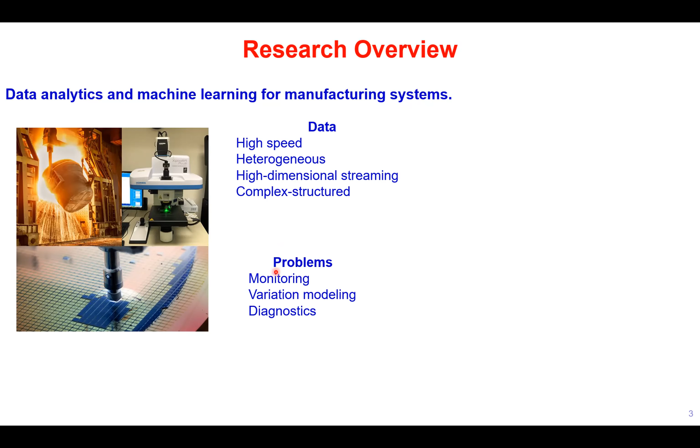In one sentence, my research is on data analytics and machine learning for manufacturing systems. I'm dealing with complex manufacturing systems like steel rolling, steel manufacturing, semiconductor manufacturing, and advanced metrology systems. All these kinds of systems generate complex data, massive data, and data of high speed. Using this data wisely, we can perform monitoring, variation modeling, and diagnostics of the system. So I'm a modeler, and I achieve this goal through developing new models in data science and new computer algorithms. These models and algorithms are motivated by both data and engineering knowledge.

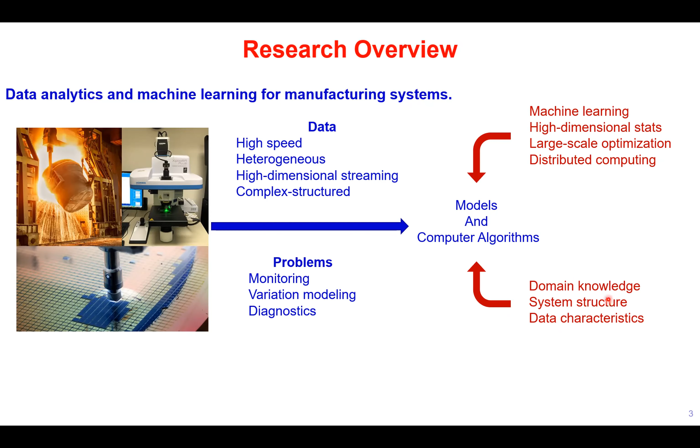From the data side, we have machine learning, high-dimensional statistics, large-scale optimization, and distributed computing. And from the engineering side, we have domain knowledge and also the structure of the manufacturing system, and also the characteristics of the data.

We can see a typical example in semiconductor manufacturing. The chips are fabricated in this way: first we have a wafer substrate, and onto this wafer substrate we deposit a thin layer of material. Then it goes through a polish process so that this material becomes flat, and then we apply a thin layer of photoresist material and develop patterns on this photoresist material. With this pattern, we can selectively etch certain regions of the previous layer. And after another round of deposition and polish, we generate this specific pattern on the second layer. This process is repeated multiple times in the semiconductor manufacturing process.

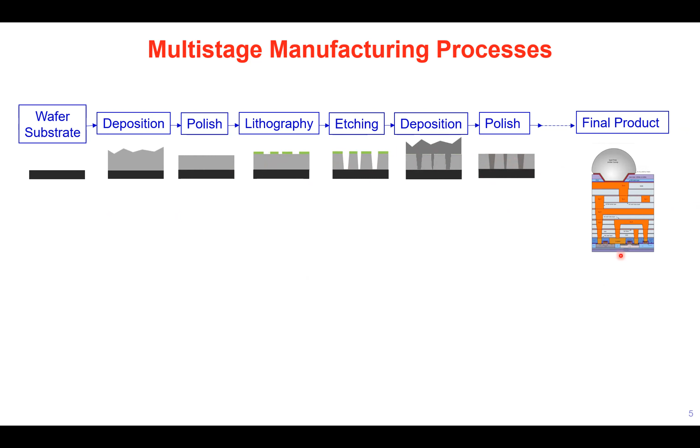Finally, we generate this cake-like structure of the circuit, and that's our final product, the computer chips.

From the data side, every process generates different kinds of data. For example, after deposition and polish process, we have film thickness data. After lithography, we have overlay field data. And after etching, we have profiles of the etched trenches, etc. At the same time, we can record different potential root causes in different manufacturing steps—they are environmental variables or information related to the material, etc.

This process is a typical multi-stage process, and it is characterized by error propagation. Error propagation means that the information from one stage—the potential root cause from one stage—will not only affect our output from this current stage, but also propagates downstream to other stages.

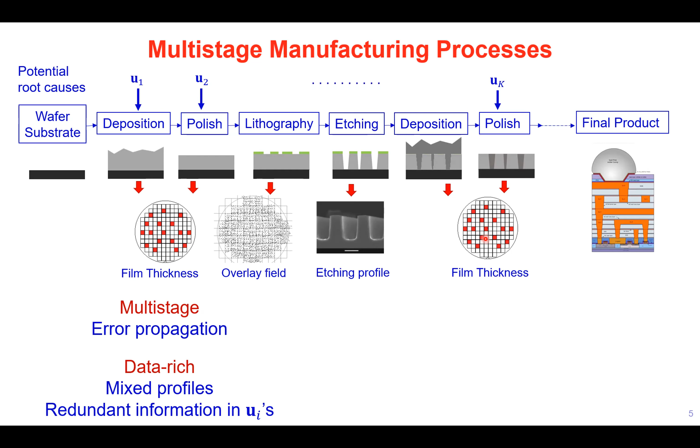Also, this is a data-rich manufacturing process. In every different stage, you have different types of data—curves, images—and these curves and images are of different sizes. So how does the industry deal with this type of data?

Actually, currently these different processes are in different departments, so they just perform monitoring, control, and virtual metrology inside each different stage. Another kind of approach is that they extract useful features from every stage and then perform modeling. But as you can see, the first approach generates a scenario of data silos, meaning all this data is analyzed individually, they do not share information, and we cannot use their relationship in modeling quality and for quality improvement.

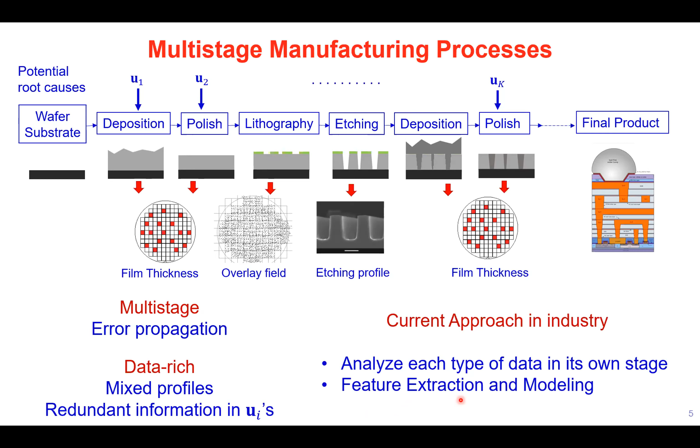For the second approach—feature extraction and then modeling—if the feature extraction is wrong, then my final result will be wrong. So what is the objective of this research?

I aim to develop a holistic framework for multi-stage manufacturing processes in data-rich environments. I hope that this approach can achieve three goals: first, we can identify the actual root causes that indeed affect the process quality and product quality; second, we can know how these root causes affect the quality measurements; and finally, we want to associate quality measures with several key variation patterns.

So the contribution of this work is threefold. First, we propose a general and extendable framework for the data analytic problem for multi-stage manufacturing process. This general framework can analyze the heterogeneous quality measures and potential root causes simultaneously.

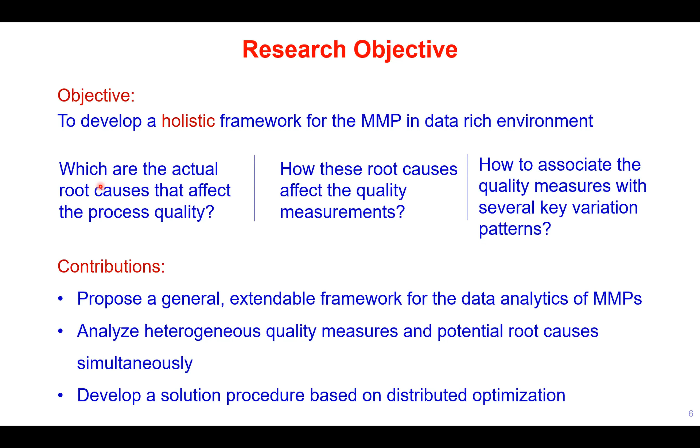We also developed a solution procedure based on distributed optimization, which is very important because this kind of process involves so much data.

Before our modeling, how we deal with this data depends on the process and data characteristics. What are these characteristics? We talk about error propagation: the potential root causes may affect the current and follow-up stages. We call this the cascading effect.

We try to keep a very comprehensive set of potential root causes, but not all of them are troublemakers to the process. So we want to select the actual root causes from them, and we need to consider the sparsity of actual root causes.

The third thing is the smoothness of the quality measurement. We mentioned that the outputs are mixed profiles, curves, and images. To effectively lower the dimension of the problem, we need to consider the smoothness property of these curves and images. The fourth thing is that usually the quality outputs are associated with relatively few underlying quality issues.

This means for different actual root causes, they may cause similar kinds of quality problems on these outputs.

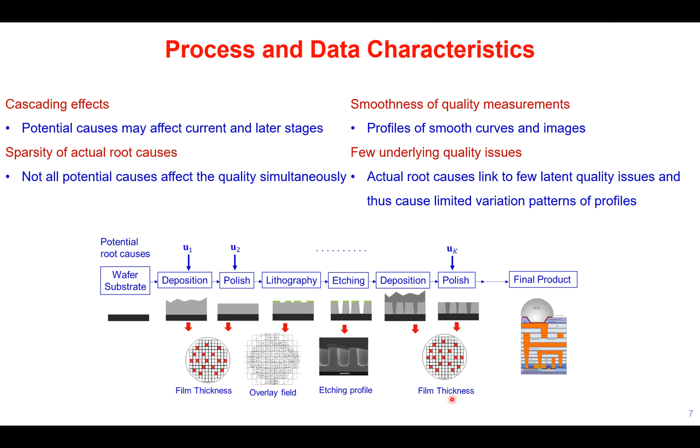Based on this consideration, we propose the following process model. There are K stages in total, and for every stage we have a vector of the potential root causes, which are our measurements. Also for every stage, we have a matrix output.

That's our quality output, and these outputs either represent multiple functional signals or one image. We assume a linear relationship between potential root causes and all these quality outputs.

So we develop this linear model, and we consider the cascading effect so that the stage K potential root cause can only affect stage K, K plus 1, K plus 2, etc. This is a linear model with scalar inputs and matrix outputs.

If we collect all of these coefficients together, we have many offset matrices and many effect matrices, and they are the coefficients of our model.

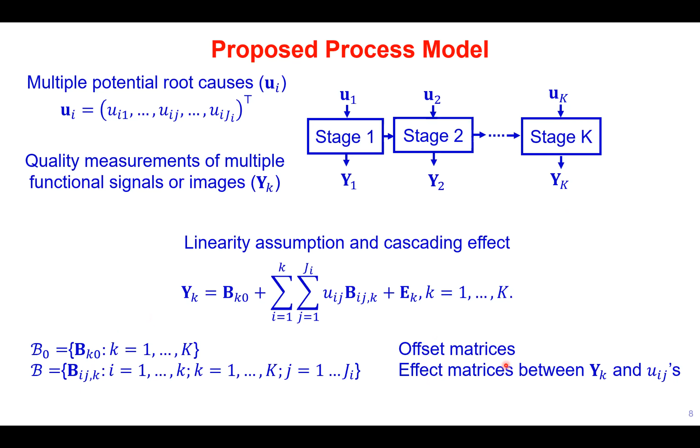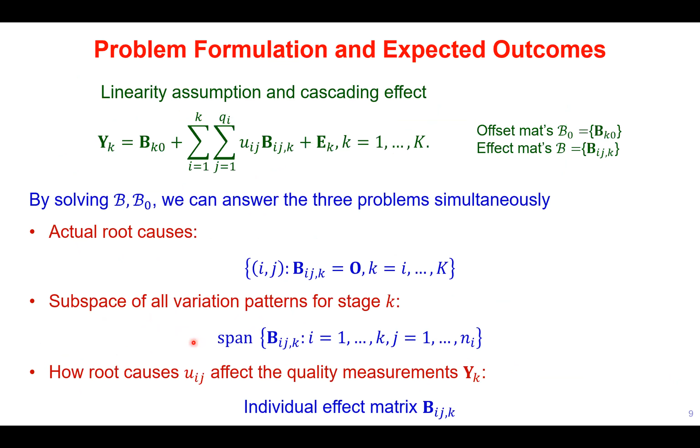Estimating these coefficients is a hard thing to do, but if we obtain these estimations, we can actually answer all three questions we posed before. We can find the actual root causes and the subspace of all the variation patterns, and we can also know how root causes affect the quality measurements.

So to perform this estimation, we formulate a machine learning problem. This problem involves one loss term plus several regularization or penalty terms. The loss term reflects the magnitude of the prediction error.

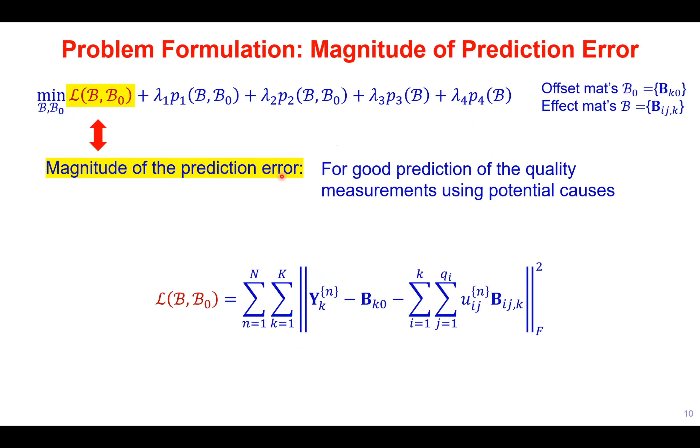That is to say, how well my potential root cause can be used to interpret my product quality.

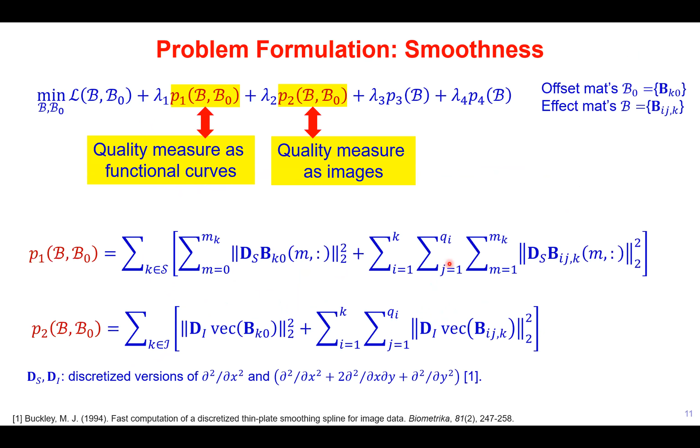The second and third terms are used to represent the smoothness of the response. Because the quality responses are smooth, the associated coefficient matrix rows or the entire matrix are smooth, depending on whether this stage is associated with multiple curves or a single image. So we apply these two smoothness penalizations in the second and third terms.

For the fourth term, we select the potential root causes. Not all potential root causes are actual root causes. If something is not an actual root cause, it will not affect the system at all. So how do we represent this?

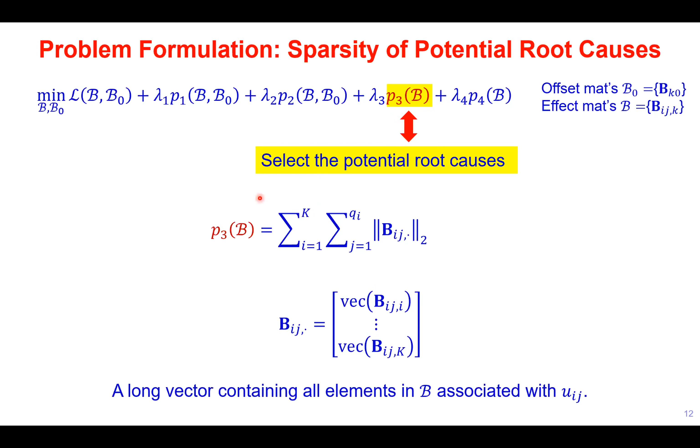We collect all the elements within the effect matrix that are associated with this potential root cause Uij, and try to align them in a vector. We apply the two-norm and use this group lasso penalization to help us identify the actual root causes.

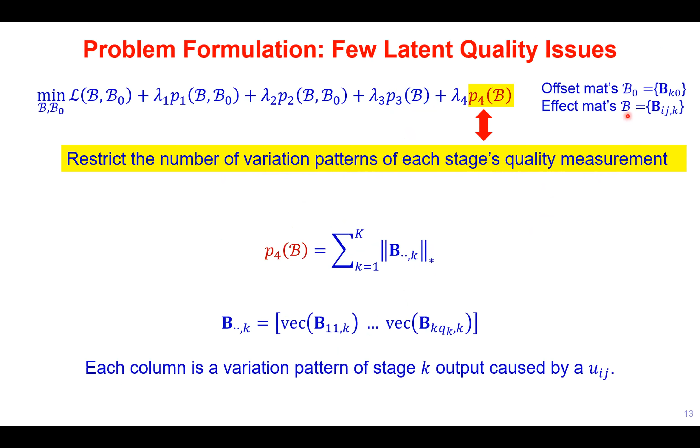For the last term, we restrict the number of variation patterns of each stage's quality measurements using this nuclear norm penalization, which also associates with the reshaping of the effect matrix here.

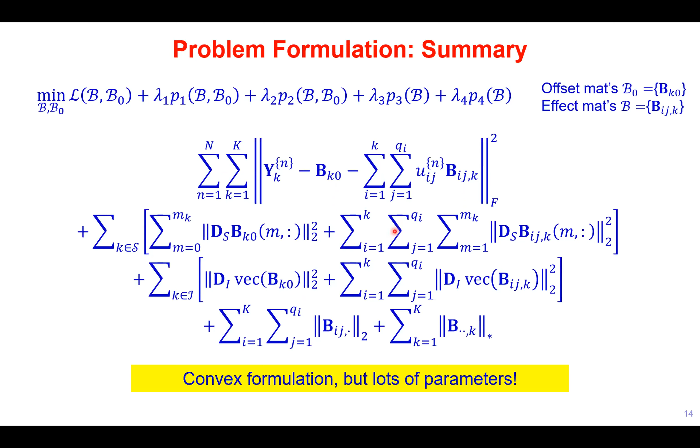So in general, if I put everything together, this is my objective function to solve these all the coefficients B, and that is very, very complex. However, that's a convex formulation. Then how to solve this problem?

Specifically, we developed an efficient algorithm for the curve smoother and the image smoother based on discrete cosine transformation.

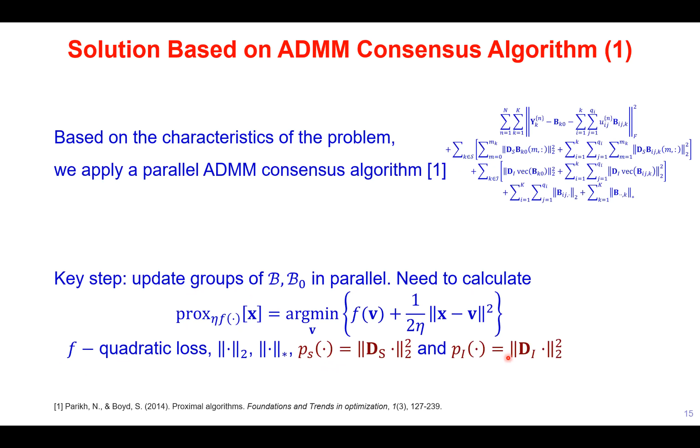And here is the overview of the ADMM consensus algorithm. We just ignore the details in this algorithm, and let me briefly introduce how it works. First, we initialize B and B0 with several replicates.

And then in the iteration, we first update different groups of elements in each replicate of B and B0 individually, and all these operations can be performed in parallel. Then in a global aggregation step, we aggregate all of the updates for these replicates and calculate their grand average, to complete this step of iteration.

So you can see that if I have a parallel computing framework, this algorithm can be achieved effectively.

And in the simulation study, we verified this approach using a 4-stage test bed with 20 potential root causes. You see in different stages that generate different kinds of quality output, either multiple signals of different length or different sizes of images. We find that this algorithm identifies the actual root cause, understands the root cause effect on the profile measurements, and also identifies the subspaces of underlying quality issues.

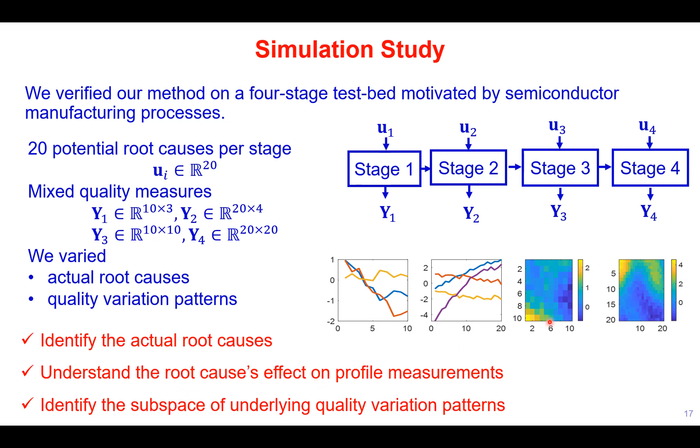So I just skip the details of this simulation study, and here's my summary. In general, in this work, we propose a holistic modeling and root cause diagnostic framework for data-rich multi-stage manufacturing processes.

So for this framework, we consider multiple root causes in every stage, and the quality measurements of multi-signals or images of different sizes.

So the significance: the first one is that this is the first multi-stage manufacturing process analysis method based on distributed optimization. And the second one is that this method is extendable to more types of data by adjusting these loss terms and penalization terms. So highly customizable.

And now I'm going to briefly introduce two other research topics just for you to get a sense of the flavor of this series of research. The second one is involved with a steel rolling process.

And we propose a multiple event identification and characterization algorithm by retrospective analysis of the data. What is retrospective analysis? So if you're a data scientist, you go to a factory and say, okay, I can solve your problem.

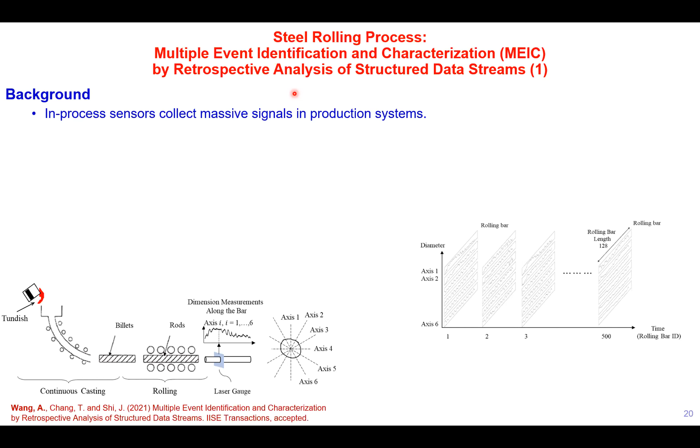And also during what time the variation happened, right? So this is what we mean by retrospective analysis.

And the current approach of achieving this is: first, we use some quality control methods to identify in which time segments there is something weird happening in this data, and then clustering analysis to see what are the types of faults in these different time segments, right? However, this is not automatic, and the error in detection will lead to wrong classification results.

So our goal in this work is to develop an automatic tool for retrospective analysis. It can perform the event identification and characterization simultaneously. So here are 3 keywords: what is event, what is identification, what is characterization.

So event here means the abnormal variation patterns that happen in this, let's say, 3-month period. And identification means we want to find the time intervals when this event occurred. And the characterization means how an event affects the sensor signal, right?

So let's see an example. This is a steel rolling process, and this steel rolling process fabricates rolling bars. And after the fabrication process, this rolling bar passes this laser gauge.

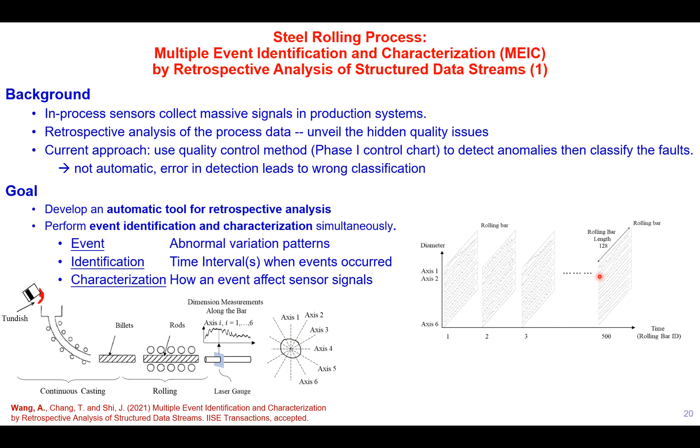And in total, we have 500 products. So this is the data that we have. And through this event identification and characterization process, we can decompose this into several types of events.

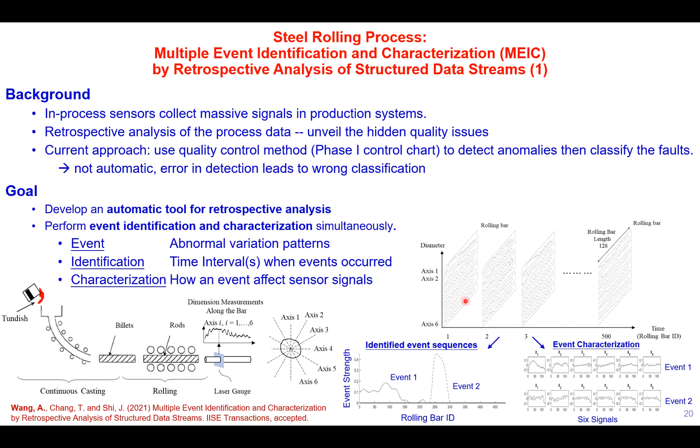For example, we can see event 1 happens at time from 0 to 100, and event 1 causes this kind of variation pattern in my data, so axis 1 is larger at the first half. For event 2, which happened between 200 and 250, it's characterized by a tapered end of the rolling bar. This is the outcome of our algorithm in general.

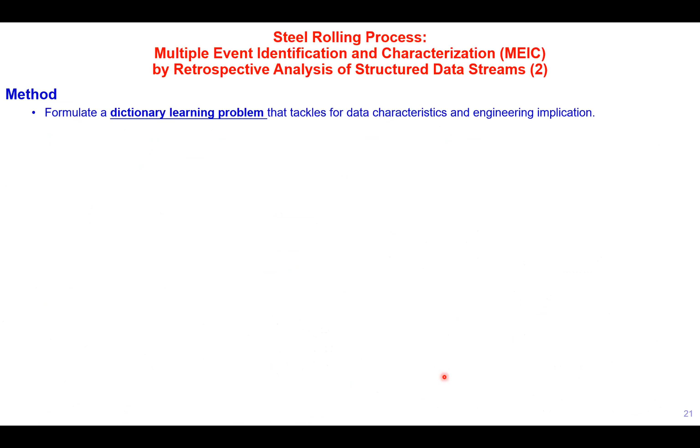How did I achieve this? I formulated a dictionary learning algorithm that tackles the data characteristics and the engineering implications. Here is the optimization problem that I formulated, and here X is my data matrix.

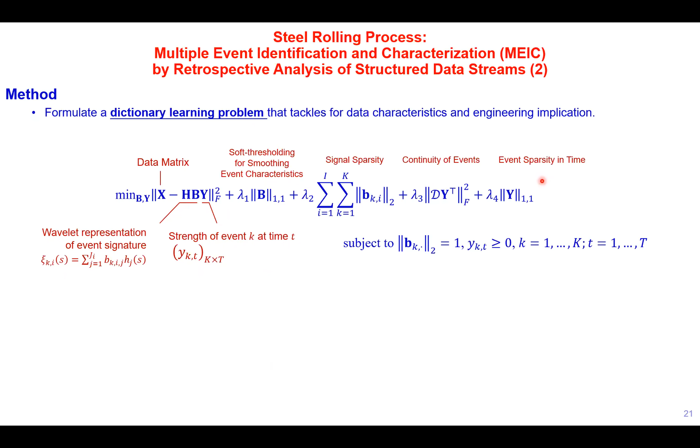This data matrix is decomposed into the multiplication of my event signatures, represented using wavelet functional data analysis methods, and also the strength of the events at different times. I used multiple penalizations to reflect the smoothness of these event signatures and the characteristics of the event sequence, and then I used a blockwise coordinate descent algorithm to solve this problem.

So here's the outcome and the impact. This approach is validated by a simulation study and real steel rolling data, and it significantly automates the process of retrospective data analysis, especially when we have multiple functional curves or high dimensional data. This is a useful and automated tool for quickly understanding massive processing data.

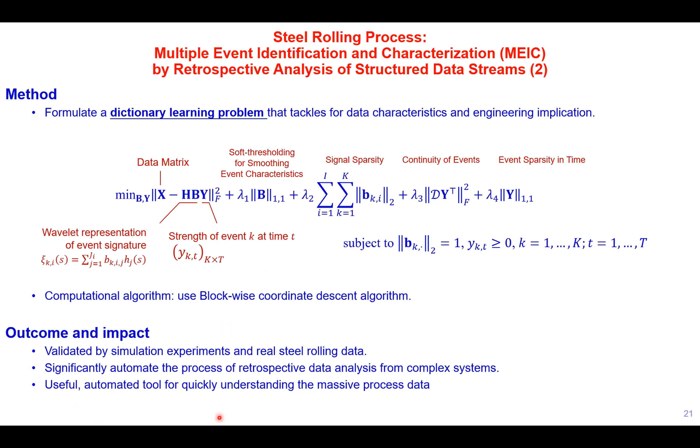Okay, finally I'll quickly go through the last example. This example deals with tensor data analysis for CT image analysis. Tensor data are like data blocks, either 2D signal arrays or image sequences, and they frequently appear in many applications. It's high dimensional but content-rich information.

Our goal in this study is to uncover the information buried in the tensor object. For example, we can see this series of CT images obtained from the aortic valve of a human heart, and you can see there are yellow regions that are calcium deposition on this vessel. Our goal is to identify that region for reconstruction of the prototype.

Our approach is to decompose the data tensor into the summation of three parts: background, calcium, and measurement error, to find the regions of calcium. This is our output, corresponding to each frame.

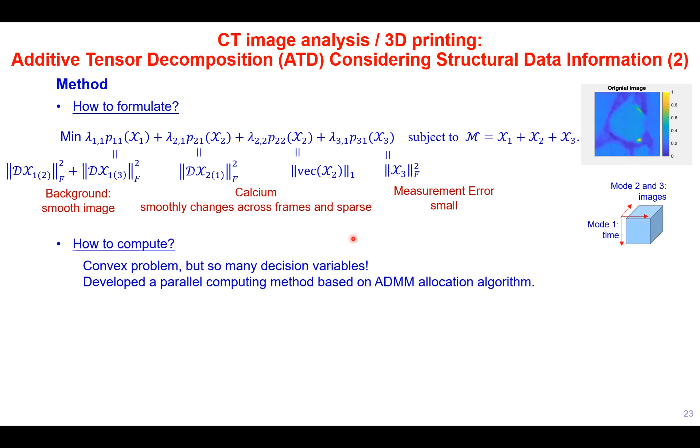How did we achieve this? Again, we formulated an optimization problem where each term tackles different characteristics of the background, the calcium deposition, and the measurement error, addressing smoothness and sparsity properties. Then we proposed another optimization algorithm based on ADMM to solve this problem.

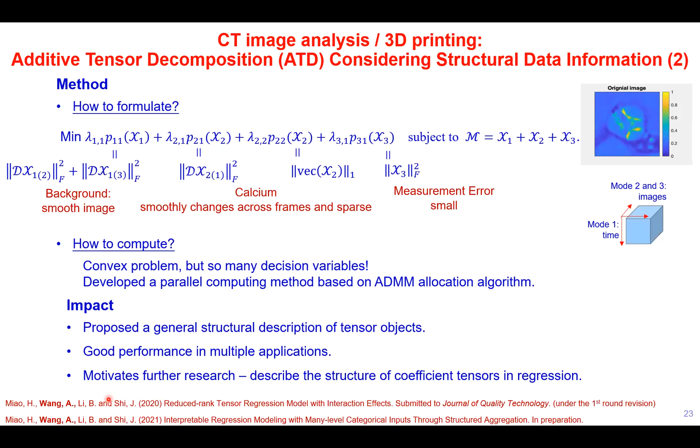This is actually a general structural description of tensor objects, and this method is applied not only to this medical problem but also to other data analytical problems involving tensors. This also motivates further research into tensor regression, etc.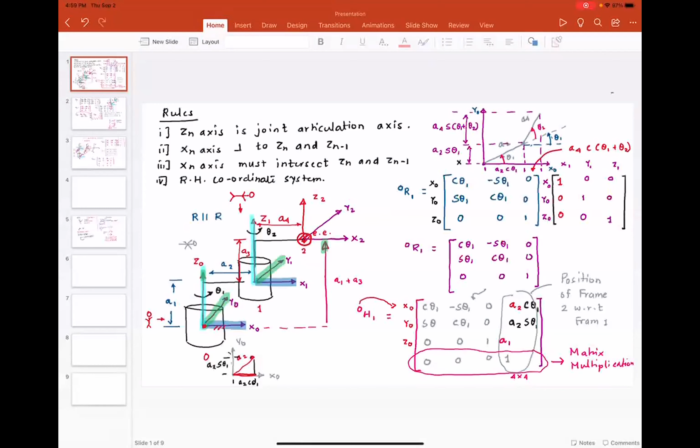By now you should have some understanding of what the project is, and you should have actually started working on the project and 3D printing. I just want to make sure that if there are any questions related to the project, or to the class or lesson, I would be happy to answer. Any questions on the material we have discussed so far? Any questions?

Quickly, if you have 3D printed your components, from next week onwards you are welcome to stop by. I will announce the office hours for Borna along with the checklist, and then you can come and start picking up your parts. But one thing you want to decide is what project you're going to work on, because the microcontroller you will get will be suitable for the project you have in mind.

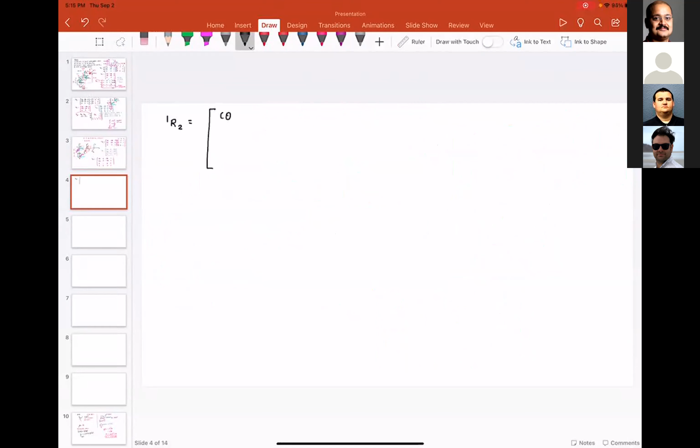So in last class, we worked out developing the homogeneous transformation matrix related to the first joint. Now what I'm going to do is write the homogeneous transformation matrix for the second joint, and we are going to start with the rotation matrix. So now, 1R2 - since the axis of articulation is aligned with Z, my rotation matrix is going to remain the same: cosine theta 2, minus sine theta 2, 0, sine theta 2, cosine theta 2, 0, 0, 0, 1. But don't forget the important part, which is the projection matrix.

Just a second, Zoom quit unexpectedly. Zoom unfortunately is giving some problem today - it all of a sudden started asking for passcodes. Zoom is quitting. Unfortunately, that's bad.

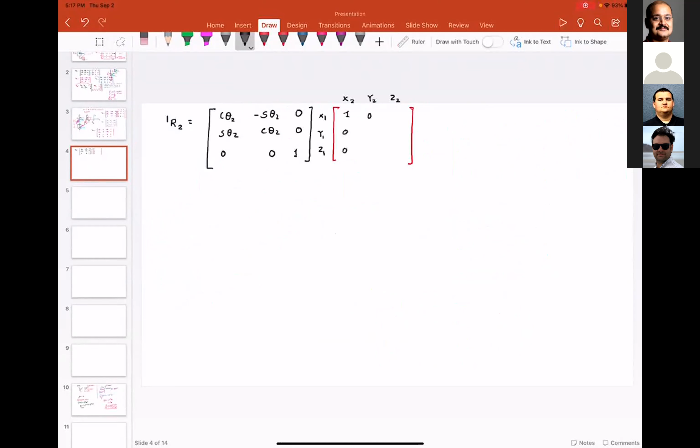Okay, finally. So what I need to do is I need to have x2, y2, z2, x1, y1, z1, and let's check x2. Can you see x2 is aligned with x1? Are you with me? Y2 is aligned with y1. Z2 is aligned with z1. What does that mean? This is going to be 1, 0, 0, 0, 1, 0, 0, 0, 1. Agreed? And the product of these two is going to be my rotation matrix. What would happen to my homogeneous transformation?

Recording in progress. Yeah, I'm pretty sure there is an issue with Zoom server. I guarantee you there is an issue with Zoom server.

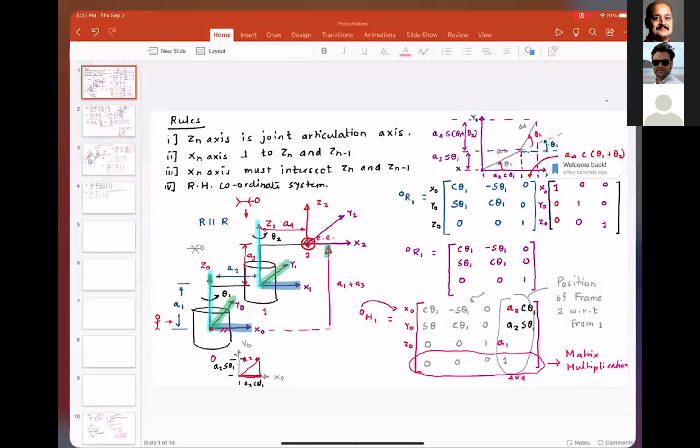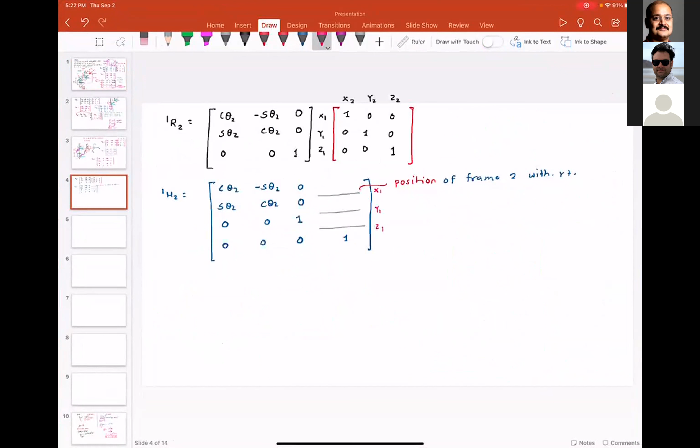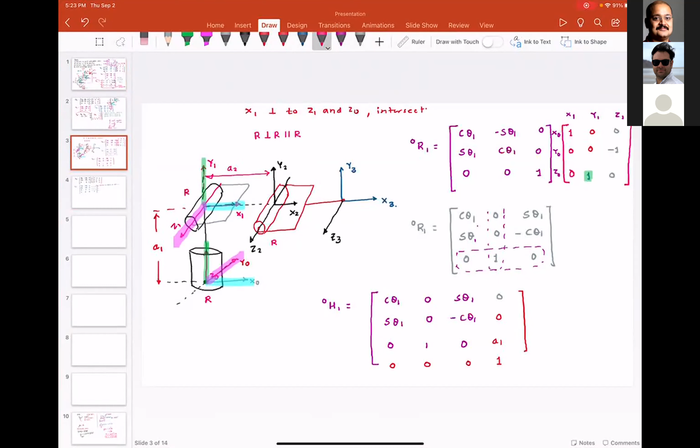Okay. Position of frame 2 with respect to frame 1 along x1, y1, z1. Now let's start. What do we have? Please note, I'm going to add one distance, which is here, which is A2. I will ask you the very first question. So look at their z-axis. Can you see that those z-axes are aligned? Do you agree with me? Those z-axes are aligned in a sense that they are parallel to each other. Now, my question to you is, first and foremost, can I write 0 over here?

Can you hear me now? Okay. Yeah, you're good. Okay, awesome. Finally. So today, unfortunately, we have some issues with technology, but nevertheless, we will continue studying.

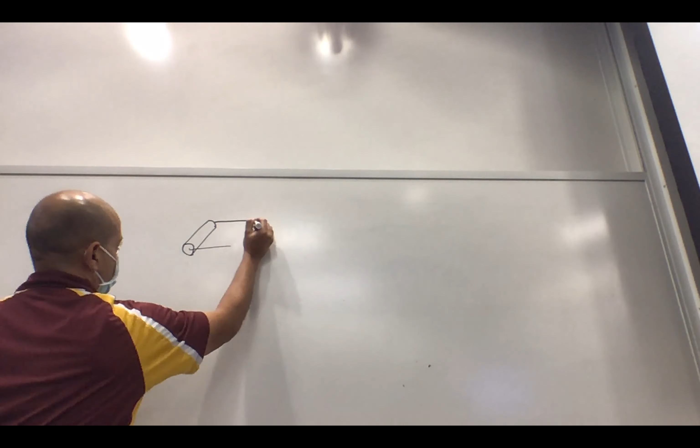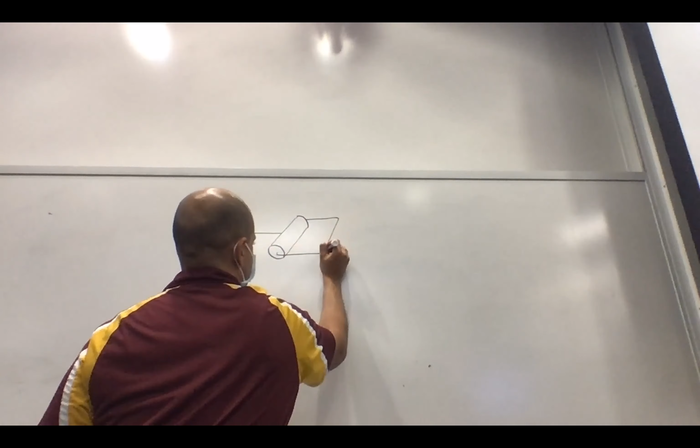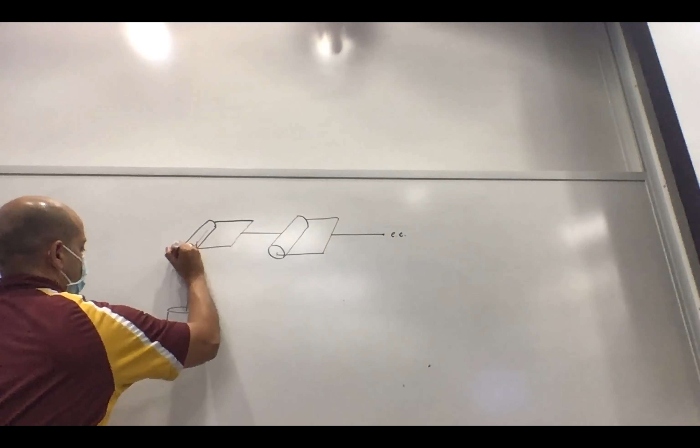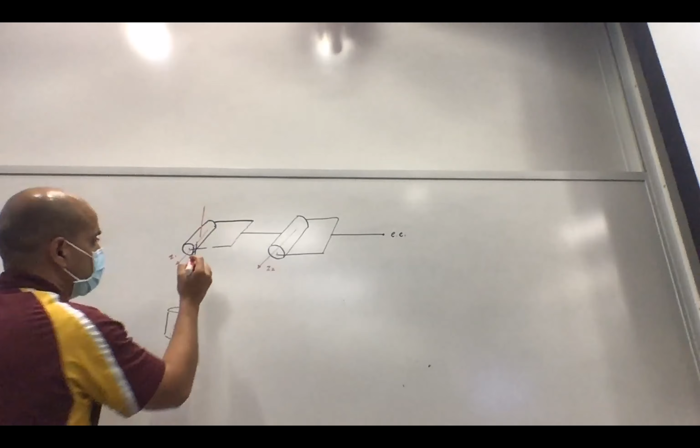So you have the first revolute joint that we actually finished. Then you have the second revolute joint, and then you have a third revolute joint, which is over here. And then we have this end effector. Bear with me for a second, let me set up the z-axis. This is z1, this is z2. Then I have x1, and I have y1, and I have x2, and I have y2.

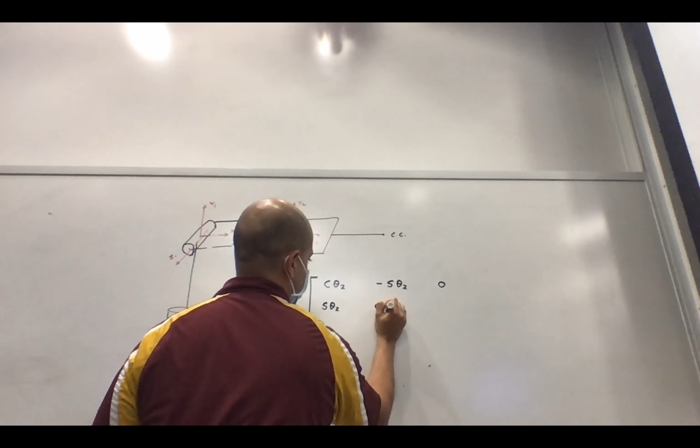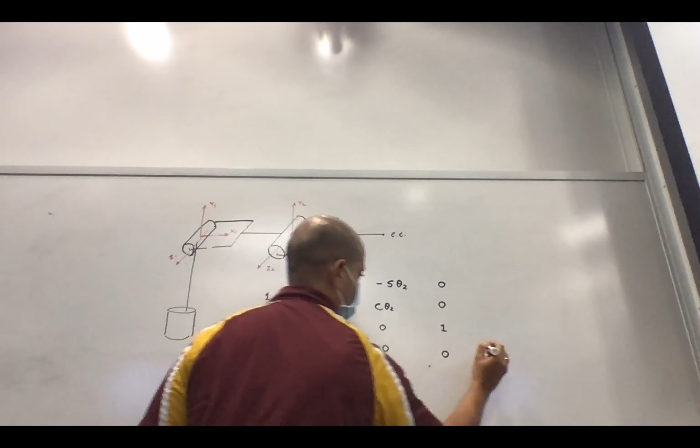Now the objective here is to find out 1H2. 1H2 is cosine theta 2, minus sine theta 2, 0, sine theta 2, cosine theta 2, 0, 0, 0, 1, 0, 0, 0, and you have 1 over here.

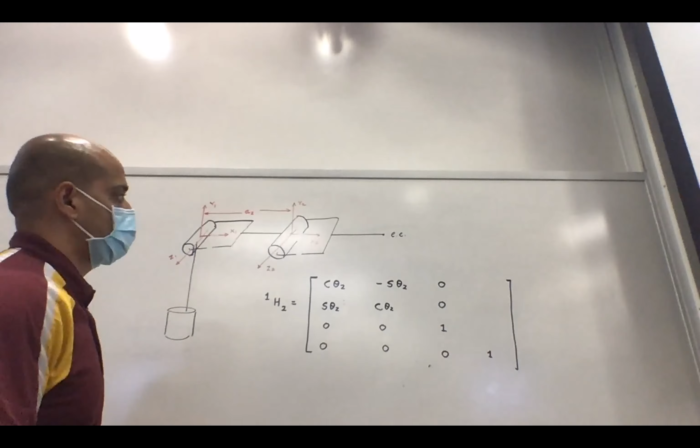Now I want you to observe that this Z1 and this Z2 are parallel to each other, but they are in one and the same plane, and this plane is not going to change. So what it means is I'm going to write 0 over here. The next thing I want you to observe is, as this joint rotates - this is very important, this is my theta 2 - as this revolute joint, which is frame number 2, rotates with respect to frame number 1...

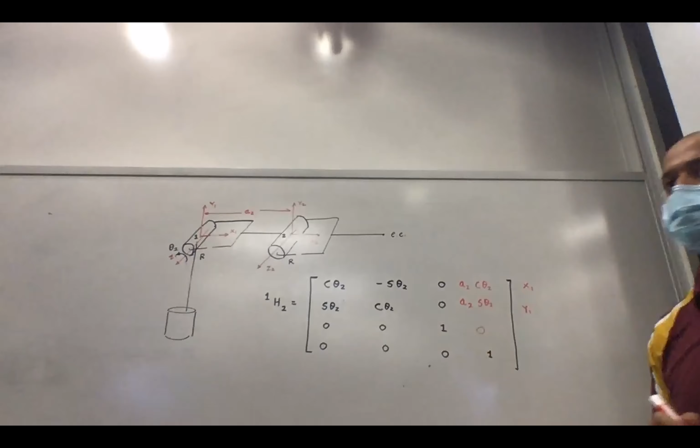So this is my frame number 1, this is my frame number 2, so frame number 2 is going to rotate. So I want to find out the component, or the position in x1, position in y1. We looked at this type of problem in last class. Can I write down A2 cosine theta 2 and A2 sine theta 2 as my second homogeneous transformation matrix? It is absolutely important that x1, y1 - again these are the distances, A2 sine theta 2, these are the distances - but these distances must be expressed in the previous frame vector. So it needs to be x1. So please check that you have a vector going A2 cosine theta 2 and A2 sine theta 2. When theta 2 is equal to 0, A2 sine theta 2 becomes 0, and this just becomes A2, which is the case in the present situation. Everyone understood this?

Question? Online question? It's not for... Okay, so this is x1, very important. X1 comes from here.

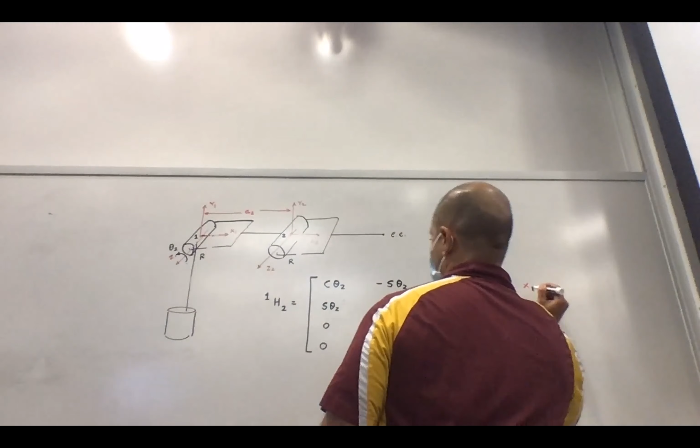Now what I'm going to do is, and the next part is super simple - last frame, to save my work, I assume this frame to be aligned with the previous frame. So this is x3, y3, z3. And this distance, I'm going to give you as A3. So this distance is A3.

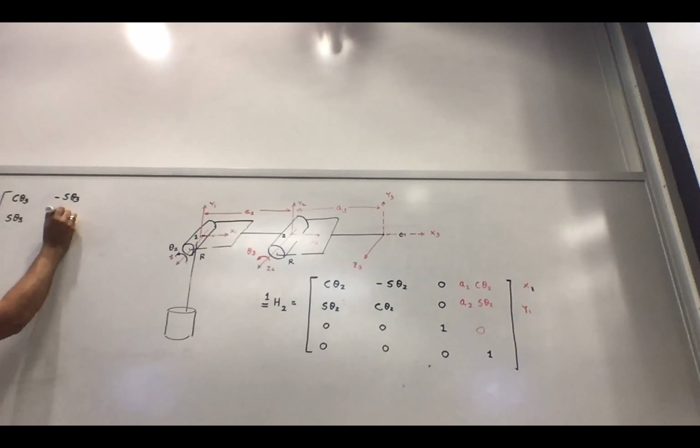Now what I want you to understand is a super simple example here. First and foremost, what is the rotation transformation corresponding to this joint? So the rotation transformation corresponding to this joint is governed by theta 3. I'm going to say here 2R3. Again, the rotation is about z. So cosine theta 3, minus sine theta 3, sine theta 3, cosine theta 3, 0, 0, 0, 0, 1. And never ever forget the projection matrix. Can someone tell me what the projection matrix is going to look like?

X3, Y3, Z3, X2, Y2, Z2. Isn't it the identity matrix? Yes, this is an identity matrix.

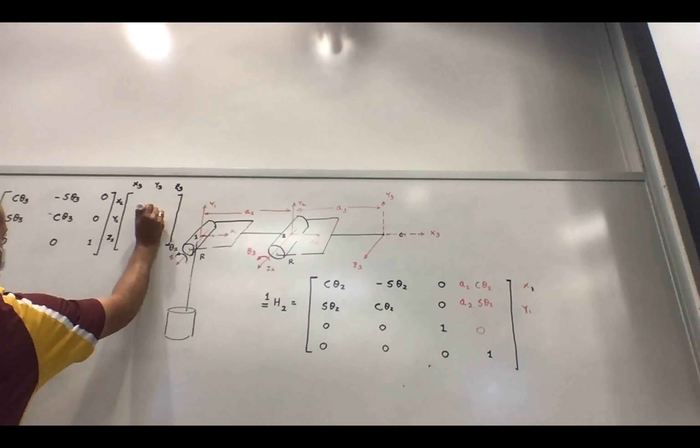So for 2H3, you can tell me this is going to be cosine theta 3, minus sine theta 3, 0, sine theta 3, cosine theta 3, 0, 0, 0, 1, 0, 0, 0, 1.

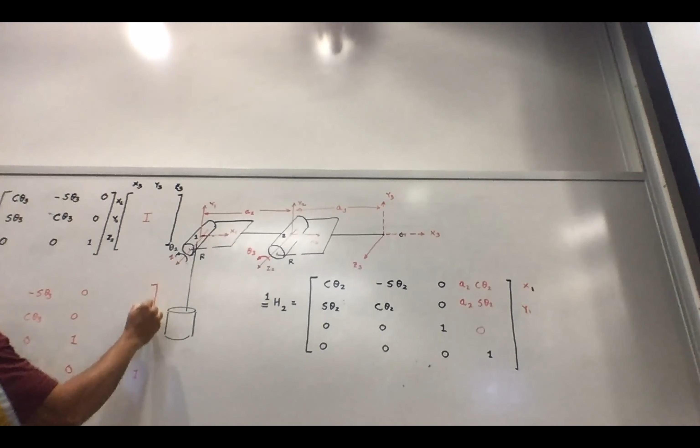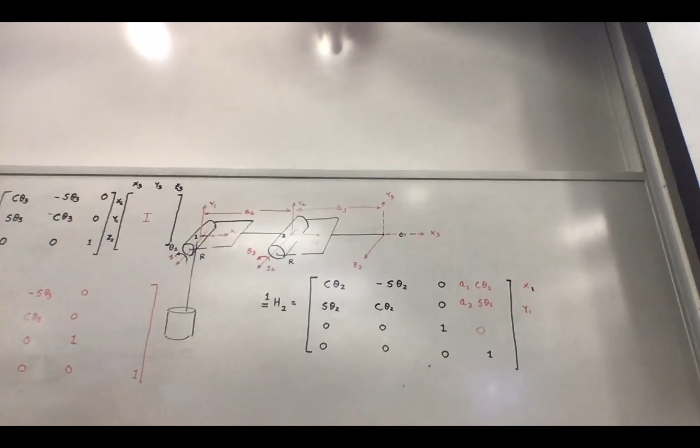And please note, once again... question? I don't think they can see that. Yeah, we can see that.

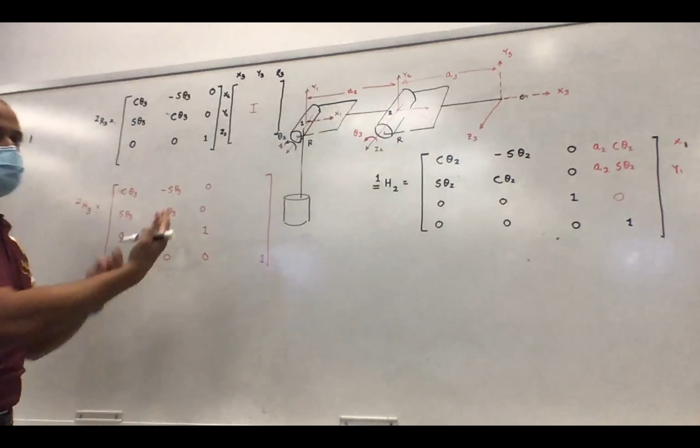Okay, so here please note Z2 and Z3 — they are in the same plane, so again I'm going to write 0 here. Again, please note this should be X2, Y2, Z2.

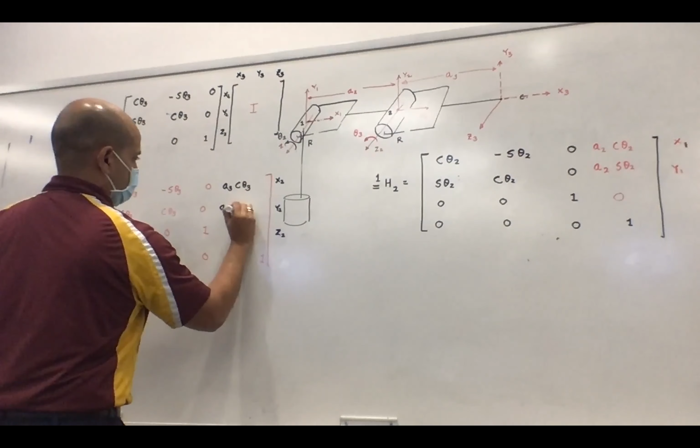So X2 is going to become A3 cosine theta 3, A3 sine theta 3, and let's not forget this one. Everyone understood this?

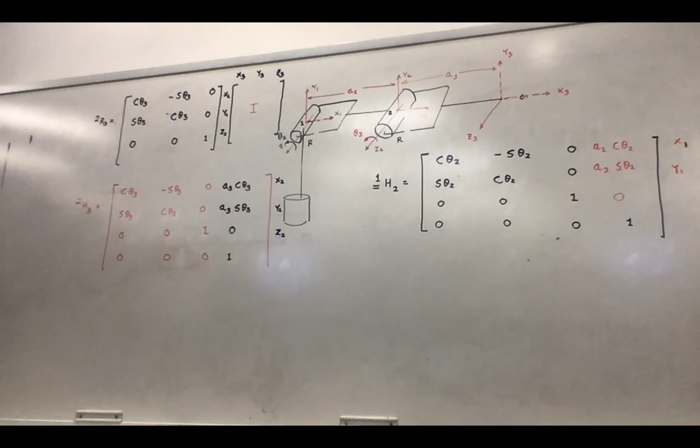Now at this point you can be adventurous and try to perform matrix multiplication by hand, or be lazy like me and go to MATLAB. So that's what I'm going to do. I'm going to open MATLAB.

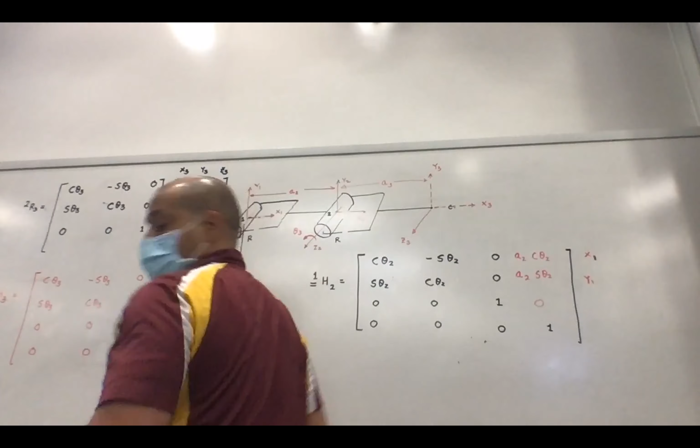Bear with me just a second while I actually open MATLAB. Can you put a board up? What do you want me to do? Put a board on top. Well, if I put the board on top, then I think those guys won't be able to see. So why don't I do something like this? Is it good? Yeah, and I'm gonna leave this over here so you can take a picture later if you want to.

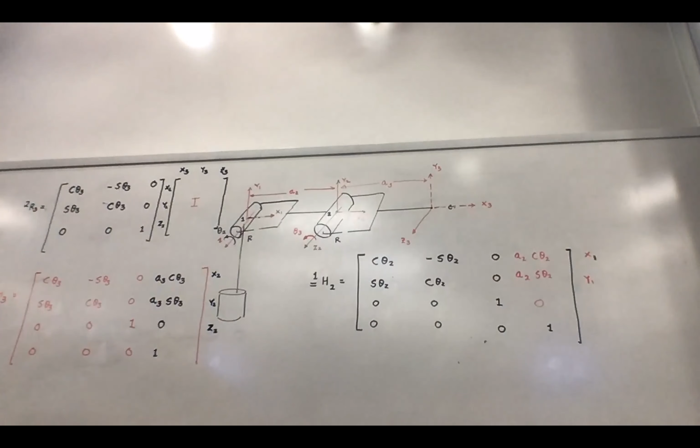Okay, now let's open our big and bulky MATLAB. I'm gonna share my MATLAB screen, and then we will work out this problem in MATLAB. I think I will have just enough time to finish this problem inside MATLAB.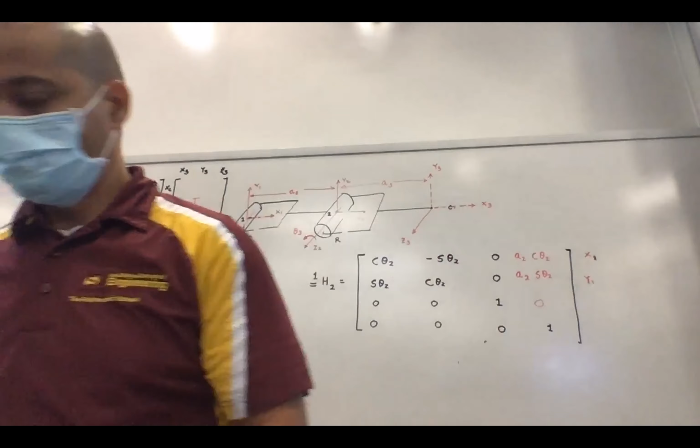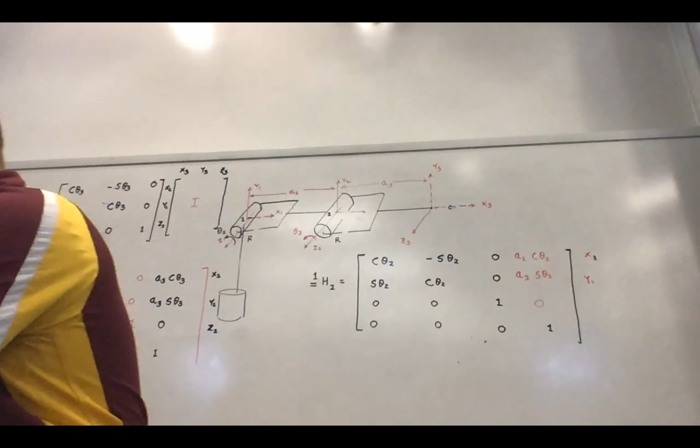So, new script. First line: SYMS, because we are going to have symbolic variables theta 1, theta 2, theta 3, and I'm going to have A1, A2, and A3. Then H01 is equal to... let me quickly see the homogeneous transformation matrix that we derived.

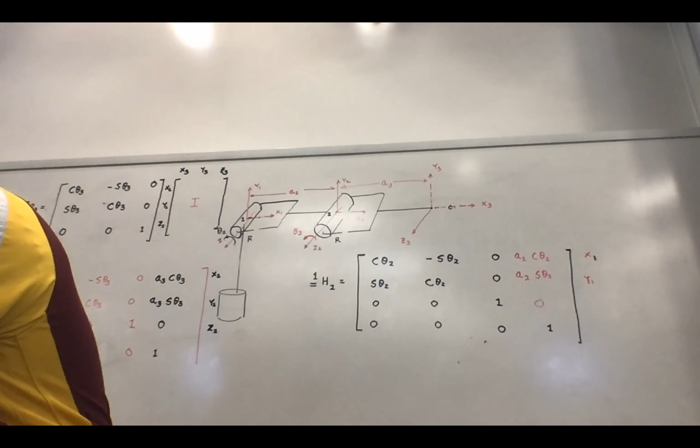The homogeneous transformation matrix that we derived, and you can correct me. Professor, can you share your screen? We can't see MATLAB. Okay, yeah, absolutely, thanks for pointing that out. I thought it's automatic. Can you see now?

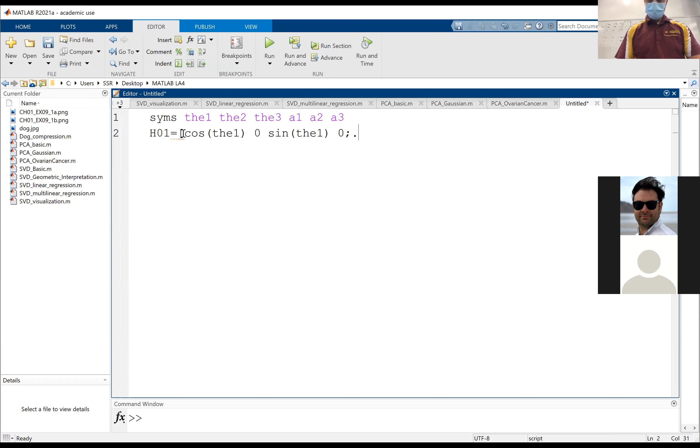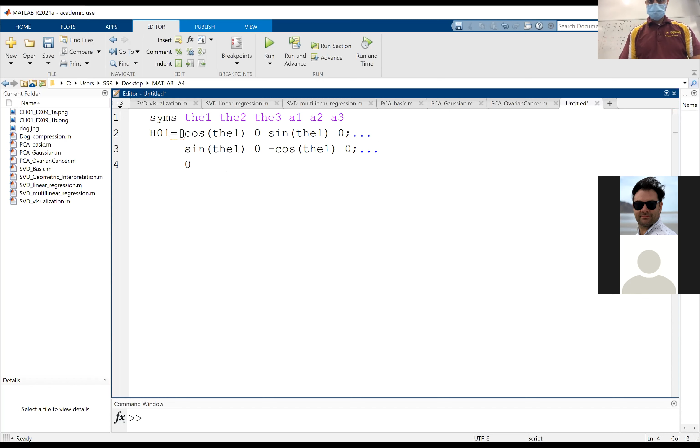Yes, thank you. So it's going to be cosine theta 1, and you can correct me if I'm wrong: cosine theta 1, then 0, then sine theta 1, then 0, and so on. Then sine theta 1, then 0, then minus cosine theta 1, then 0, and so on. Then 0, then 1, then 0, and then A1, and so on. Then 0, 0, 0, 1. This is my first homogeneous transformation matrix.

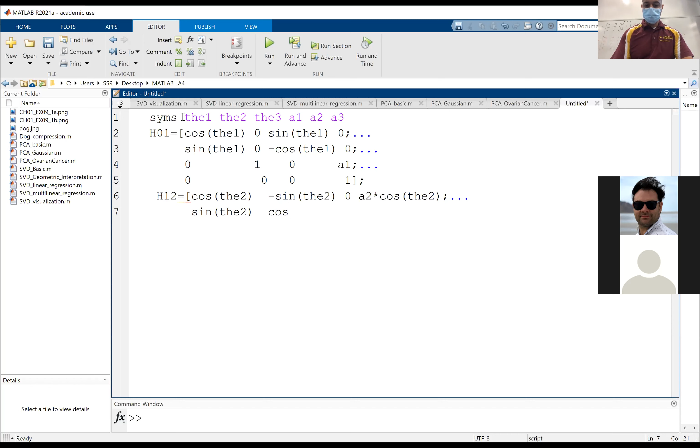H12 is equal to: cosine theta 2, minus sine theta 2, 0, A2 cosine theta 2, and so on. Sine theta 2, cosine theta 2, 0, A2 sine theta 2, 0, 0, 1, 0, and so on, 0, 0, 0, 1. I'm just gonna be a little bit lazy because this matrix is going to be the same as H23.

Only difference is instead of cosine theta 2, it's going to be cosine theta 3, A3 cosine theta 3, sine theta 3, cosine theta 3, A3 sine theta 3.

The last step is to find H03. I need to multiply H01 times H12 times H23.

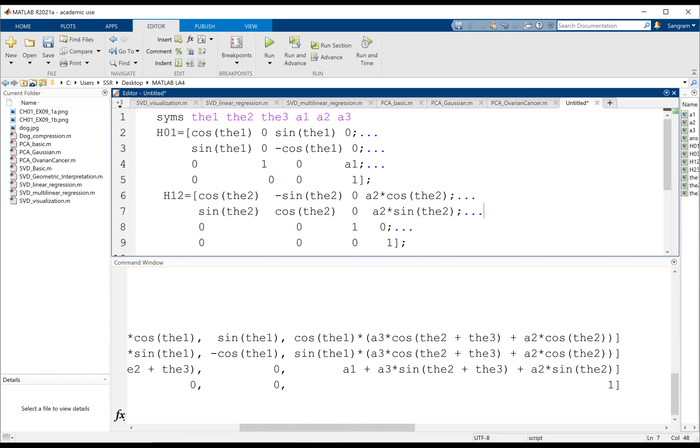Whenever you have a forward kinematic solution, I would try to provide some sort of geometric interpretation. So now what I want to show here, assuming my online students can see me, can my online students see me? Yeah, I can see you. Okay, so I want you to look at the board for a second.

So this distance is A1. This angle, again it's positive. This is Z naught. This is X naught. And this is Y naught. So what I want you to think about is this is your theta 1. Now for a second, imagine if I want to find out the position of end effector.

This is very important, I want to find out the position of end effector with respect to the inertial frame, which is the zeroth frame. This is where the big zero lies. For a moment, ignore this revolute joint.

Do you agree with me that this R perpendicular, R parallel to R, I want you to focus on these two R's for a second. This is exactly similar to the problem that we solved earlier, assuming there is no revolute joint and you have the second revolute joint and third revolute joint. This is like a two pendulum problem, a compound pendulum, and we derived an expression for that. You agree with me? What did we derive? We derived, talking about this with respect to this, we derived something like this.